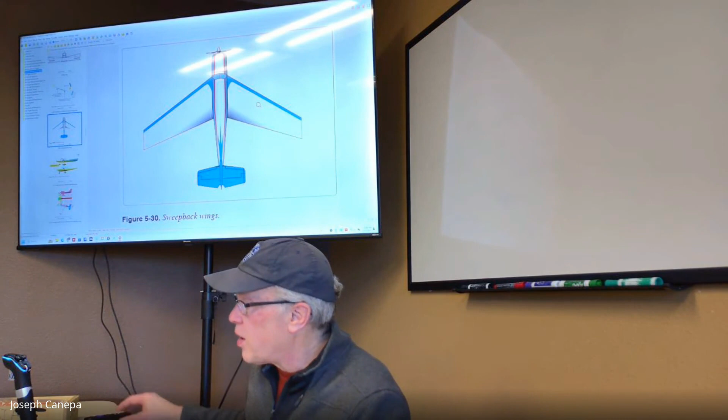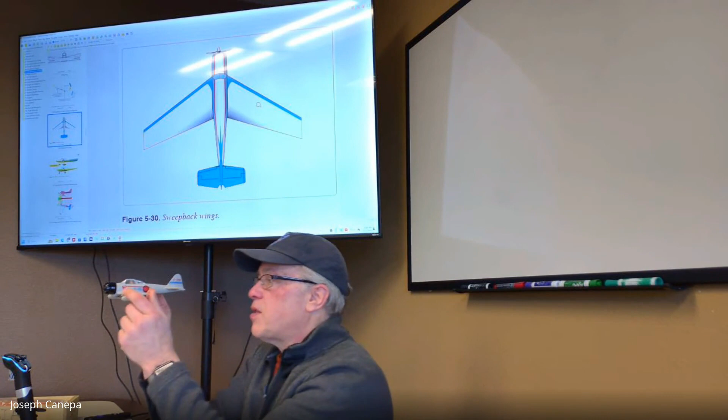Okay, yeah, this is an example of sweep back - see how these wings are swept back. You typically see this on really fast aircraft, and the reason they do that has to do with the fact that the faster an airplane gets to the speed of sound, the less stable it becomes. Let's use this one right here - this is a Japanese Zero, as a matter of fact. If this plane were going through the air at close to the speed of sound, the sound wave hitting it, if you're actually able to see it, would be touching the leading edges of these wings, and it disrupts the flow.

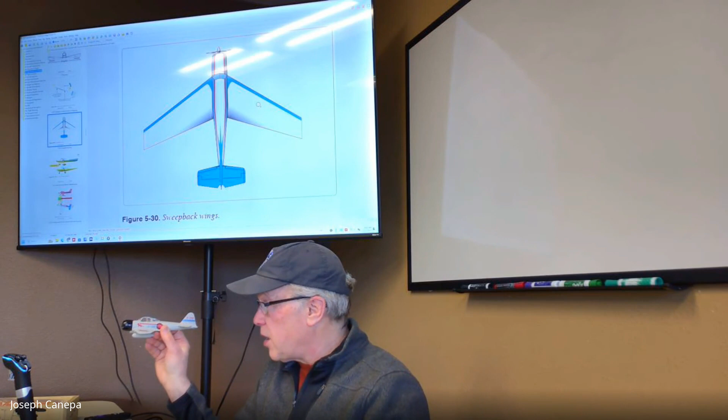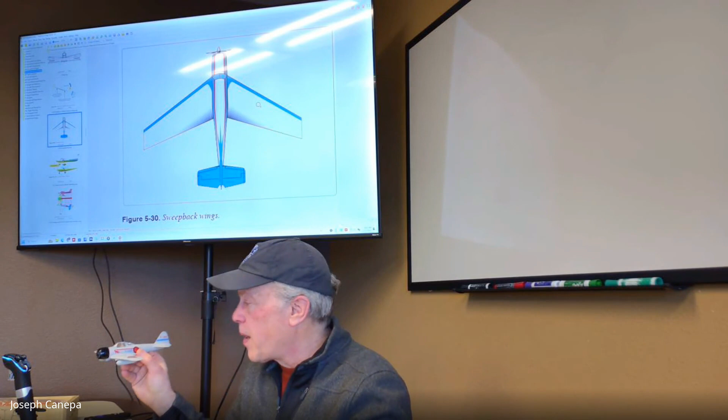The plane will actually lose control. They found this out originally with the P-38 Lightning, a larger twin engine fighter bomber used in World War II. It was a very fast aircraft, so much so that when they got close to the speed of sound, they had problems with it.

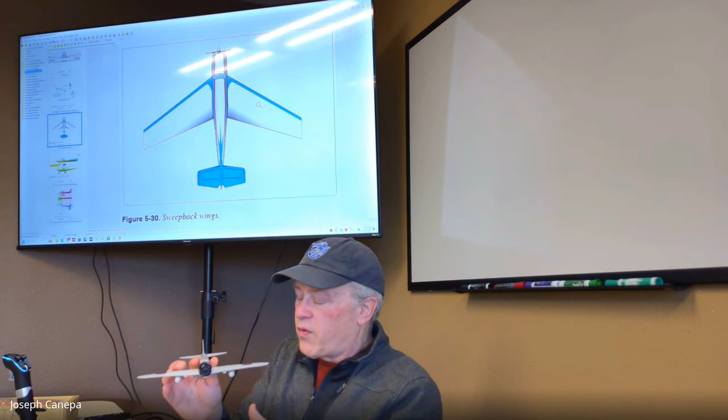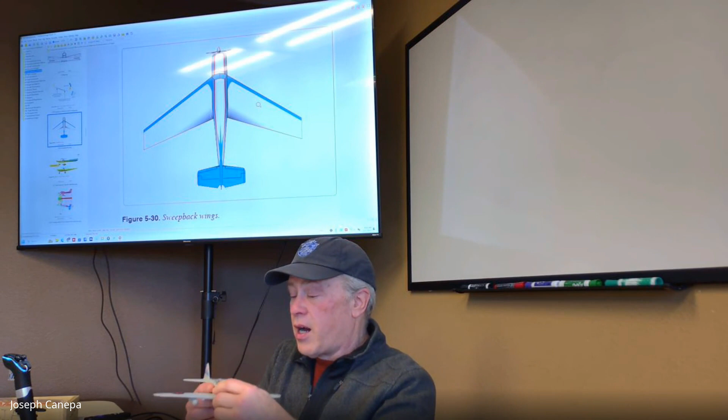Most fighters by then still weren't able to get close to the speed of sound, but the P-38 was, and in a dive it could actually reach the speed of sound. Because of that disruption, the shock waves hitting the edges of the wings prevented the pilot from pulling out of a dive, or they couldn't even use the elevator on the plane. It was going so fast. That's because of the disruption of air. Air acts very differently when you get close to the speed of sound.

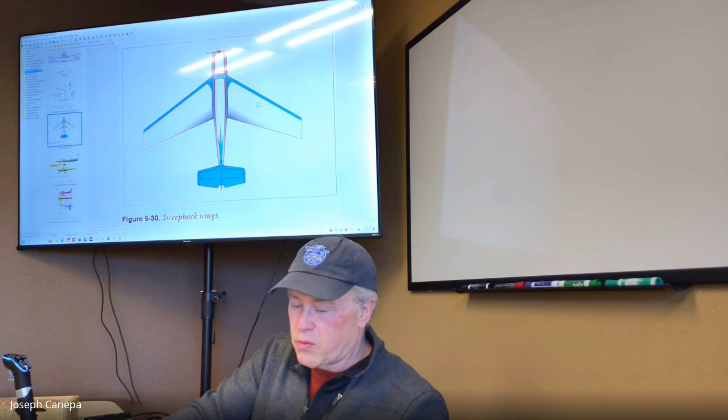You don't have to worry about this as general aviation pilots, but if you go to the military, you're going to have to know it. If you want to learn more about the aerodynamics of sonic flight, the Aerodynamics for Naval Aviators is a really good reference. It's an old book, but it's got lots of really useful material in it. So anyway, that's sweepback.

Keel effect and weight distribution. We all know what a weather vane does, right? If I were to take this and put it on a post outside, if the wind was blowing from this direction, which way would it turn? It would turn into the wind. That's a weather vaning effect, or keel effect.

This is good for us as pilots because once we get the plane moving, it naturally wants to go into the direction the wind is coming from. In this case, our relative wind is going to be this way, so the plane wants to stay in that direction because of this keel. It's just like a keel on a ship, it just keeps it steady. You've got that vertical stabilizer right there holding it steady.

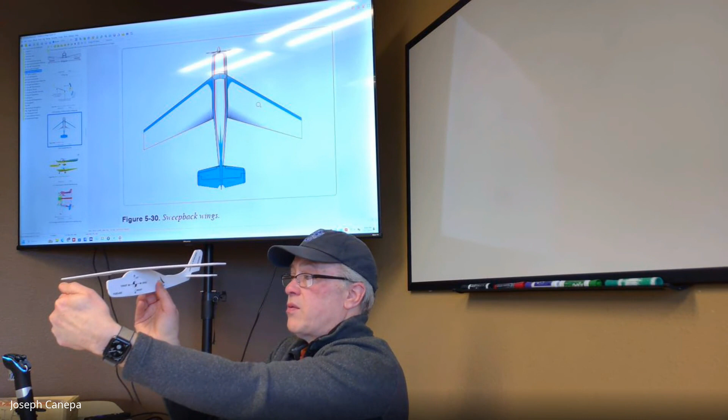That way, if we hit a bump and the plane yaws to one direction while flying, it's going to want to straighten out again. That's another stability enhancement for an aircraft. Every plane with a vertical tail surface is going to have that built into it. Some aircraft have smaller tail surfaces, so they won't respond the same way as other aircraft. Aircraft manufacturers understand that.

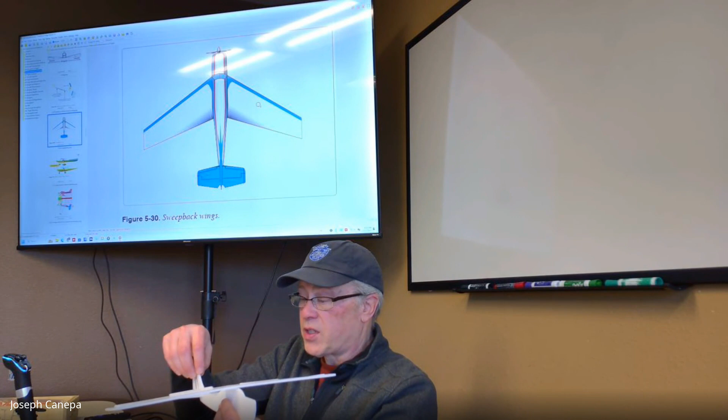That's why they could make a super huge vertical stabilizer so you wouldn't feel much yawing at all in the aircraft. If you hit a bump, it would stay pretty steady. The problem is, the larger surface area and more structures you have on the plane, the slower it's going to go. So they've got to balance that with the size of all these components and their function. They usually come up with a good balance where they can maintain decent speed, getting a plane from maybe 60 knots up to 120 knots without worrying about losing stability.

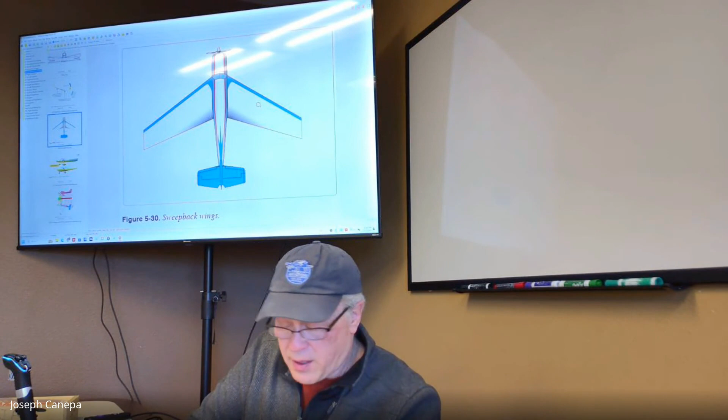So let's talk about the different types of stability in the plane. There's a term here: directional stability. Yawing - we know what yaw is, right? Everybody know what yaw is?

Okay, so to yaw in aircraft, if I press on the left rudder pedal, the plane's going to yaw in that direction. It's not going to turn in that direction, it's just going to yaw. If I want to turn in that direction, what do I have to do? Anybody? Roll. And what else?

Pitch, roll, and pitch. Because rolling into it, if I want to turn over here, to go to that corner of the room, it's not enough to just turn the ailerons into the turn itself. I have to pull back on the control yoke because we need to generate lift in that direction, something to push us in that direction. That's the lift there.

So that's what we're actually converting, our vertical lift, when we go into a turn. We're going to talk about this later today too. Basically, we're turning that sideways motion. We're pulling back on the control yoke, which causes the turn in that direction. That's what gets the plane to turn.

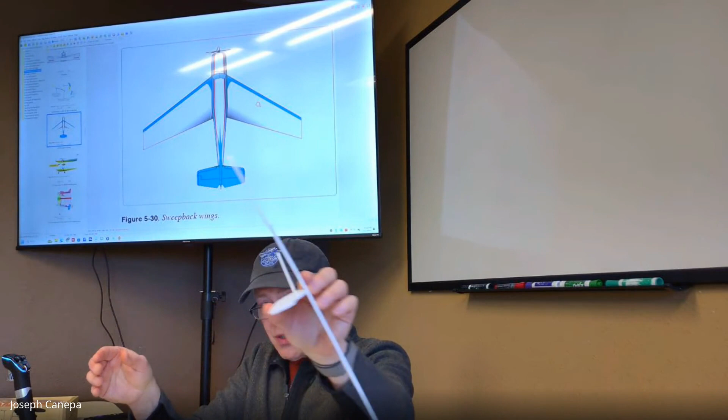It's not the rudder pedal. So if anybody asks you what causes a plane to turn, it is not rudder. Never say rudder, always say it's pitch into the turn. You're actually pitching, or angle of attack if you want to say that too. You're using that to turn into a turn.

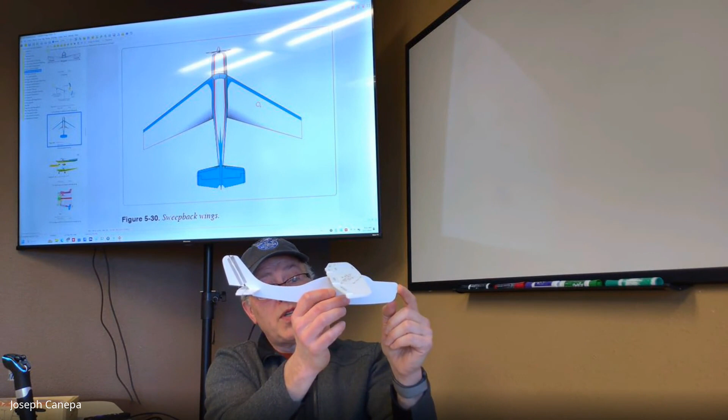Okay, so again, yaw is like this, just back and forth. This is yaw right here. So if I step on my left rudder pedal, let's do it like this - if I step on my left rudder pedal, it's going to yaw this way. If I step on my right rudder pedal, it's going to yaw that way. It's not necessarily going to turn. The direction of the position of the nose is going to change, obviously.

So if I'm at 360 degrees here and I press my right rudder, it's going to yaw maybe to a heading of 20 degrees, as opposed to 0, or 360, which is north. I think that's something we'll get into later on. But again, that's the heading of the aircraft.

So directional stability is built in by that keel effect we were just talking about. That vertical stabilizer helps keep it from yawing all over the place.

Some aircraft have smaller rudders for speed reasons, they want to get more performance out of it. And because they have smaller rudders, they actually have special equipment on board to help keep that yawing at a minimum. So they have what's called a yaw damper.

You don't have to know this for the test, but a lot of jets will actually have what's called a yaw damper that prevents the plane from doing this during flight. If you're dealing with a really fast, high performance aircraft, they oftentimes will wander a little bit, wagging their tail as they fly along. What a yaw damper does is take that yaw out of it so it flies nice and smooth.

And again, most of the smaller airplanes that we fly as trainers are going to have that built-in effect. You won't have to worry about the plane yawing like this as you fly along. So, okay, let's see.

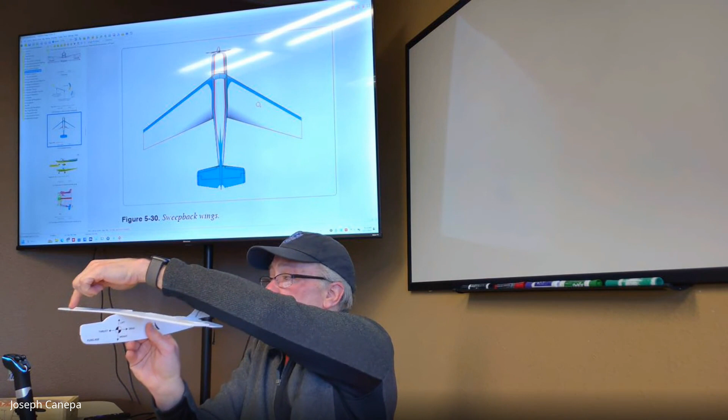Essentially, a Dutch roll - and you could induce one in a plane too - you're basically going to apply some rudder. When you apply rudder to an airplane, if I apply left rudder on this plane right here, the airplane's going to go into a turn. This wing right here is going to produce a little more lift because it's moving through the air faster.

We know that as a wing moves faster through the air, it produces more lift, right? So it's going to produce a little bit more lift, and it's going to cause it to go that way. And then to correct it, we apply right rudder, which causes this wing to come up because it's moving faster, and so we get into this oscillation. Some planes are unstable, and once they get into a Dutch roll, they may not be able to get out of it, and it gets so bad that the plane would eventually crash.

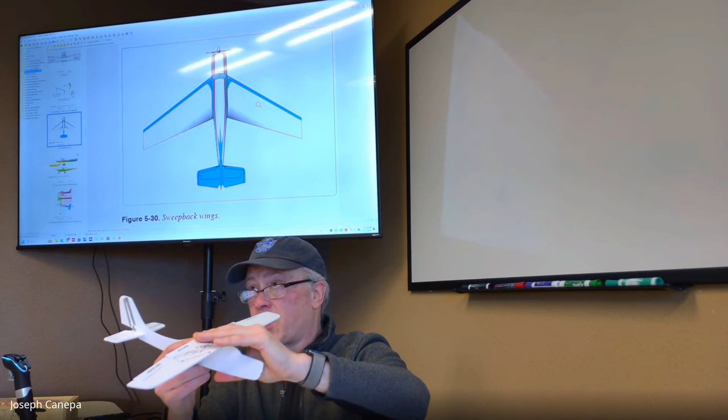One of the Learjets has a problem with Dutch roll - somebody would know more about that than I do, but I know it's a potential problem in some higher performance planes, not so much in trainers. But you can do a Dutch roll. I've done it before. There's nothing scary about them.

You just apply rudder. When you apply left rudder, for instance, the plane is going to turn like this, and because this wing is going faster, it lifts up, then we apply right rudder and this wing is going to rise up like that, and it just goes into this oscillation. You apply rudder back and forth, and the plane just oscillates.

If I apply left rudder on this side, it's going to cause it to go this way. If I apply right rudder here, this left wing is going to travel through the air faster, and it's going to raise it up like that. That's your Dutch roll tendency.

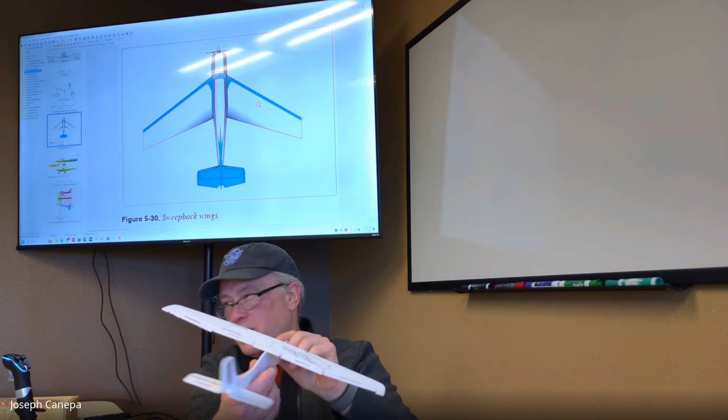Some planes will just do this on their own, but it's going to be more the higher performance planes.

Let's look at wing plan forms. These are the different types of wing designs you're going to see in aviation. They all have various purposes - some are much safer than others, and others are designed for higher performance.

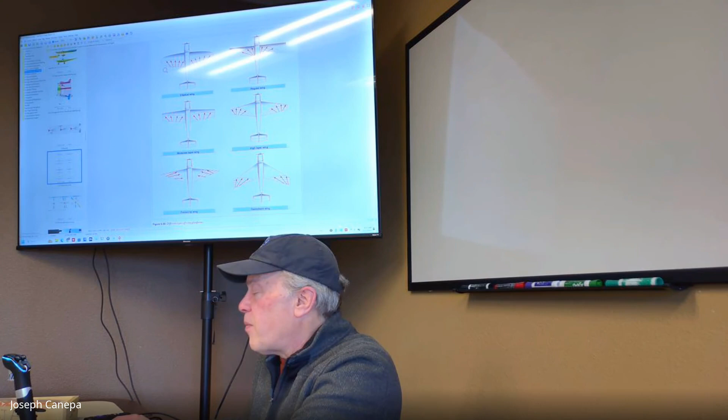The two you're going to see most often in general aviation, like a Piper or a Cessna, are this rectangular wing and this moderate taper wing. You'll see combinations of those. The rest are going to be more toward higher performance aircraft.

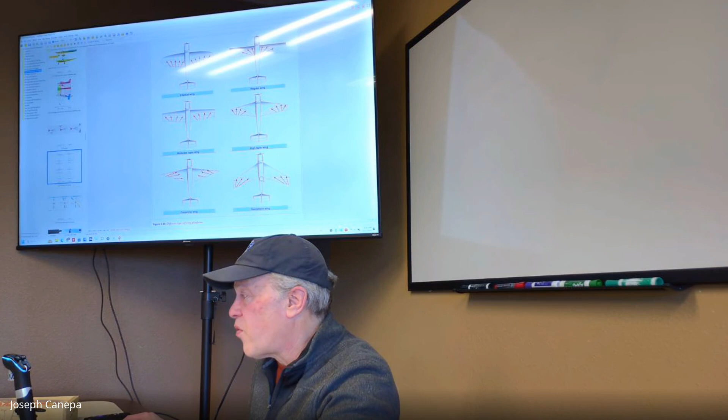The elliptical wing - does anybody know, out of curiosity, a famous plane that used the elliptical ones? The P-47. Yep, and the other big one was the Spitfire, which had a very pronounced elliptical wing.

Next time you see a British Spitfire - I think there's only one or two of them flying in the world now - but if you ever see a picture of one, take a look at the wing shape. It was a very high performance aircraft.

Most of the fighters and most of the planes you're going to see in general aviation are going to be either the rectangular or the moderate taper wing. Generally, you're not going to see sweep back for general aviation planes.

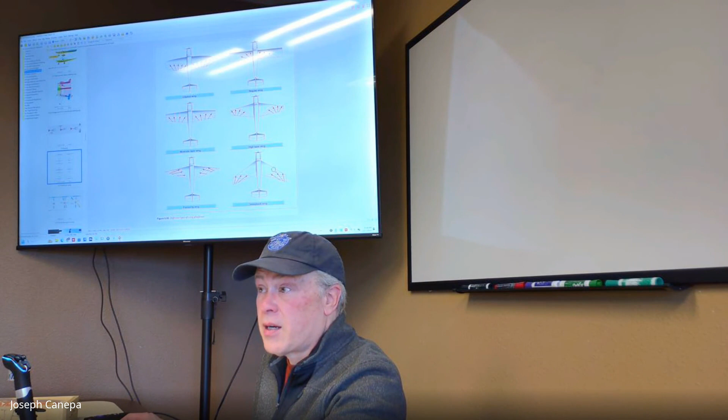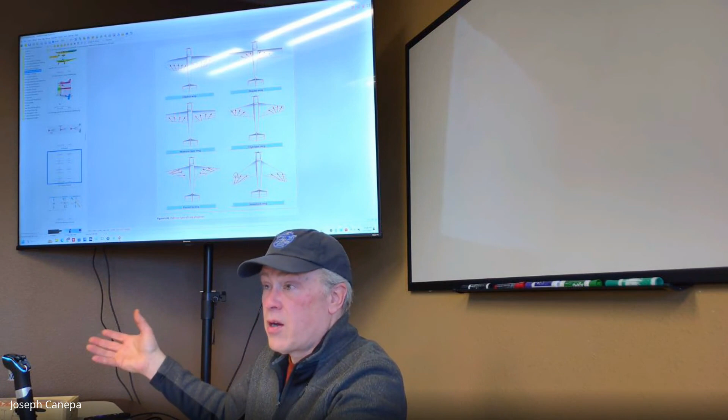You will see sweep back for commercial jets, like private jets, oftentimes. Sometimes they don't, but some of the faster jets - all the commercial airlines - have swept back wings because they travel so fast.

That's because they're going so fast, and it's for efficiency purposes, and also they have to worry about getting up close to the speed of sound. They get very close, compared to a training aircraft, which maybe only goes 100, 150 miles an hour or something like that.

Okay, all right, so let's go on and get into that here.

Did I skip an area about stabilities? Oh yeah, okay, I'm sorry. Turn back to page 5-14. We just need to go over the different types of stabilities. These you do want to know.

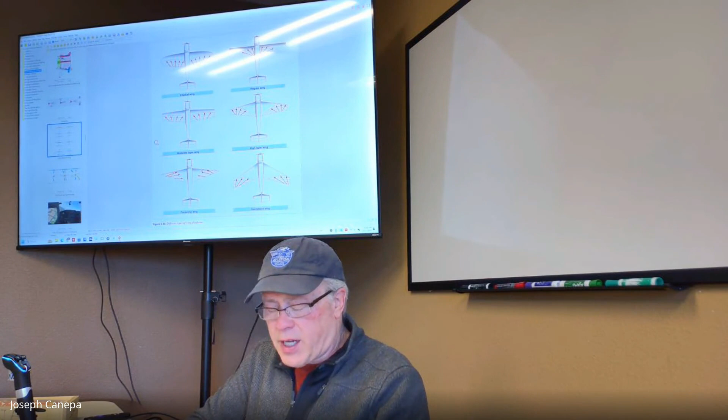So there's two different types of stabilities. There's what's called static stability, that's on page 5-14. Essentially, static stability is when you disturb something, it's what that object is going to do after you disturb it.

The simplest way to describe static stability would be to grab a marble and a bowl, put the marble in the bowl, then move that marble up the side of the bowl and let go of it. It's going to always try to get back to that center portion of the bowl.

In a plane, static stability is as simple as this: let's say you pull back on the control yoke. With static stability there's one of three things that can happen. The plane is either going to stay in that position when you pull up the yoke, and when you let go of it, it just stays like this.

That's neutral static stability. Or it's going to try to get back to where it was, which is back down here - it's actually going to point down. That's positive static stability. Negative static stability is you pull back on the control yoke, let go of it, and it continues on like that.

This is pitch stability. In this case, we're talking about pulling back on the control yoke - if I let go of it and it just stays at that attitude, that's neutral static stability.

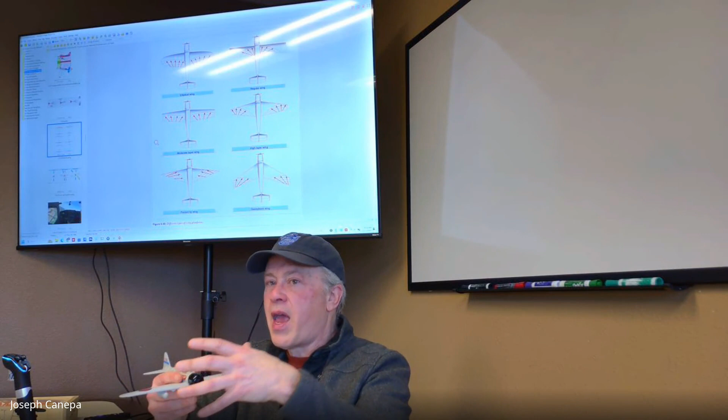Okay, so dynamic stability - this is where it gets a little confusing. Dynamic stability has to do with the time after you change or apply a force to it. So static stability again: pull back on the control yoke, it stays there, it's neutral, it doesn't move at all. Dynamic has to do with what happens to positive and negative static stability over time.

What I mean by that is if you pull the control yoke back, and let's say this plane demonstrates positive pitch stability - pull the control yoke back, the plane goes up like this, well it's got positive static stability, so it wants to go back down to get to where it was before. But dynamic stability is what happens after that.

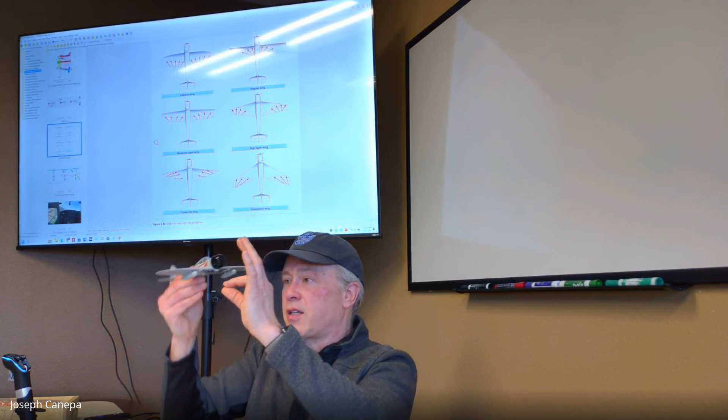So let's say it pitches down, but maybe now it goes down through where we're at. Let's say we're right here. I pitch up like this, the plane comes back and then goes down, but oftentimes what will happen in a plane is it'll go up and down and oscillate back and forth. So negative dynamic stability is where those oscillations dampen out - that's negative dynamic stability. They're going to slowly stop the oscillations, and the plane's going to come to kind of an equilibrium.

Whereas - let me make sure, oh, I'm sorry, I got that wrong. Positive dynamic stability is where it actually stops - it starts to dampen out over time. So if I pitch up like this, the plane's going to come back down. This is demonstrating positive static stability - it wants to go back down, but now it goes through the point we were at in space before, and it starts coming back. Positive dynamic stability is it's going to stop those oscillations over time.

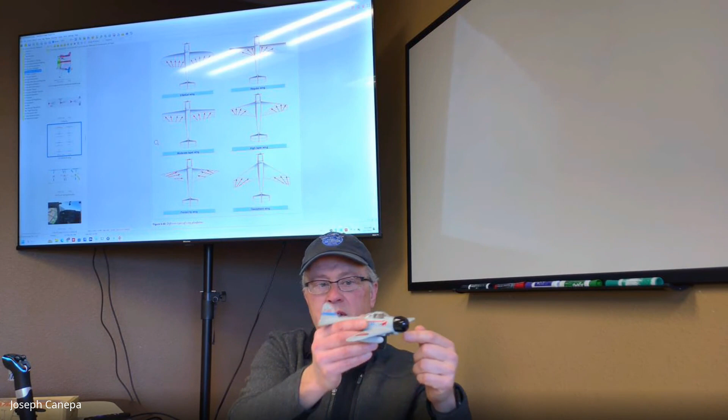This is not going to be pretty, guys. See how it's turning there to the left? We're going to actually go over that in a second here.

I just want to get that up to a reasonable altitude here.

Okay, so let me go ahead and I'm just going to trim this down a little bit, slow it down a little bit. Let's actually turn the autopilot on here. Well, no, I don't want to do that. Just get it stable here. So I'm actually just trimming the aircraft out. We talked about trim, what it does there.